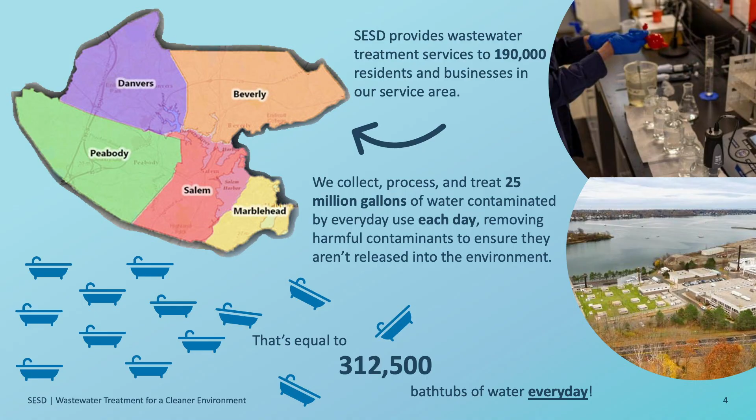So we provide wastewater services to these 5 communities: Beverly, Danvers, Salem, Peabody, and Marblehead. We treat and process about 25 million gallons of water each day, removing the contaminants to make sure they aren't released in the environment. And for those of you in the public who like to hear it in things, you can get around 312,500 bathtubs per day, so, point of reference.

We were established in 1925 as a regional municipal entity by an act of the legislature. We just celebrated our 100th year anniversary last year.

We're governed by a 6-member board. There's 1 member from each community that serves on our board, and then we've got a board chair who has to live outside of the district, outside of Essex County.

60 full-time employees. We're staffed 24 hours a day, 365 days a year, with a professional workforce with licensed operators, mechanics, electricians, lab techs, and engineers.

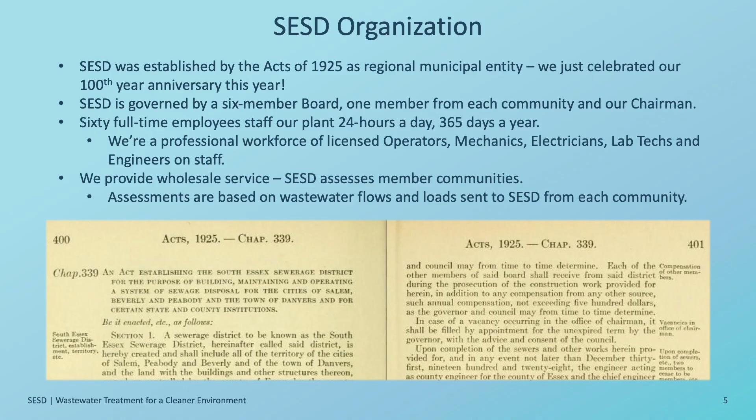And we provide wholesale service. So we assess the member communities based on the flows and loads of what each community gives us. We don't charge rates. We charge the cities and the towns, and then the cities and towns charge the rates to the ratepayers. So a little bit different model than a community-based water system.

David, is that measured at specific points, where is that coming from the community, or how do you actually do it? Yeah, so we sample every 48 hours. We take a composite sample at the boundaries of each border, and we read it for flow, BOD, and TSS. Based on that, we can determine the entire flows and loads and which portion is from which community, and then we break the budget up based on the percentage of what each community is providing to us.

So what do we do? Well, we convey wastewater from our member communities to the wastewater treatment plant located in Salem through a system of large interceptor pipes and pumping stations. The communities themselves own and maintain the sewers in the local streets, but we manage the large interceptor pipes.

In Salem, it's down along the river, goes down beneath near the MBTA station, cuts up along the bypass there, and then takes a right, goes across the toe of Collins Cove, across the Bentley School playground, and then to us at the SESD right next to the power plants where we're located.

We treat, clean, and disinfect wastewater through our high-rate wastewater treatment plant. We pump purified wastewater about a mile offshore to a diffuser located in the Salem Sound off the coast of Beverly.

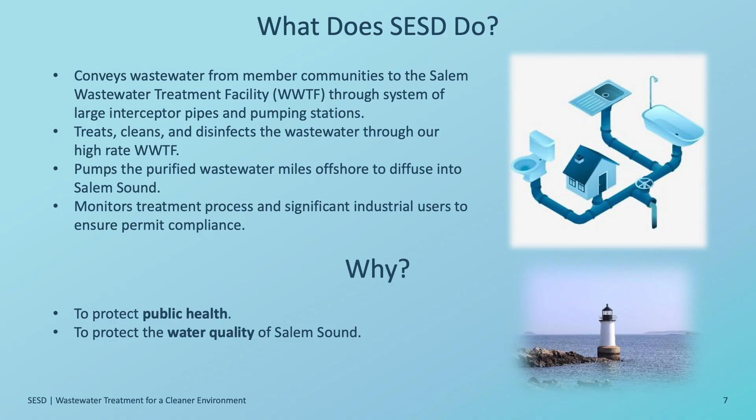So what's in wastewater? Well, certainly all the common things you think about: human waste, lint and hair, gray water from sinks and showers, washing machines, dishwashers, food scraps, grease, oils and soaps. And then some of the things you may not think about that wind up there: household chemicals, wastewater from commercial facilities, breweries, hospitals, Salem State.

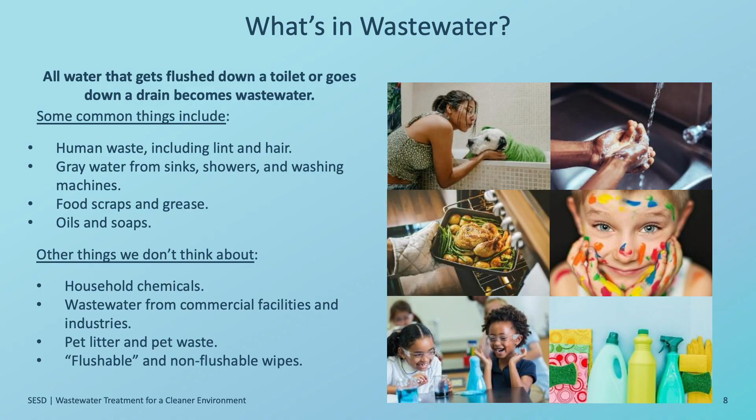Pet litter and pet waste finds its way to us. And then the other thing we're dealing with and messaging about is the so-called flushable wipes, which are not truly particularly flushable. They still don't break down, many of them, and they're an issue for us and for the industry.

We're governed by a permit issued in Massachusetts by EPA. It's a wastewater discharge permit. NPDES is a National Pollutant Discharge Elimination System permit. I'm sure many of you have heard those letters before. These are the parameters within our permit, some of the significant ones.

So the flow limit is 29.7 million gallons per day. BOD and TSS are 25 and 30 milligrams per liter, and we have a mass limit on those two constituents as well. Fecal coliform and enterococci ensure that we're disinfecting the wastewater before it goes out, which we use chlorine to do, but we can't put residual chlorine out into the harbor either, so we have to quench that. So we have a total chlorine limit, and then pH.

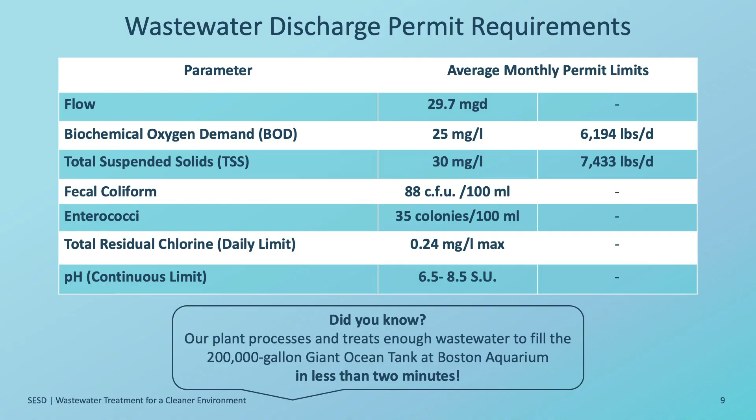So we performed pretty well. This slide's about ready to be updated - we'll get our 2025 data in there now, probably about a month from now. But it kind of tells a picture: influent TSS and BOD, typical ranges around 200 milligrams per liter each. Effluent TSS averaged 19 milligrams per liter in 2024, effluent BOD 12. We did about 24.5 million gallons per day overall average in 2024, which was a bit of a wet year, but not record wet certainly.

Which relates to almost 9 billion gallons over the course of the year. And we did pretty well on the fecal coliform and enterococci limits. We also generated almost 29,000 tons of sludge.

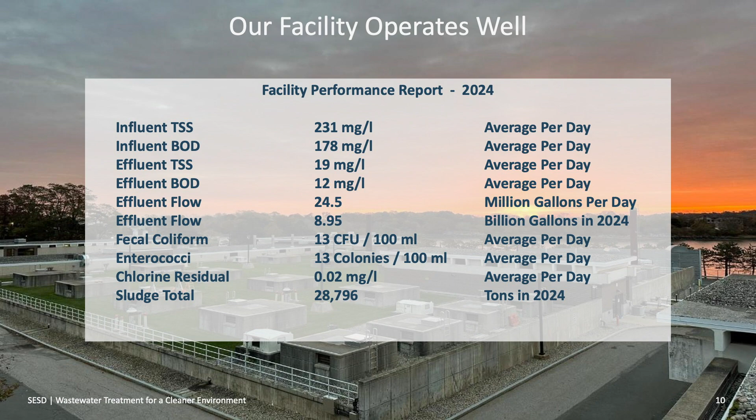I wish it was only 29,000 pounds. But we'll talk a little bit more about residuals in a few minutes.

Actually in 2015 - it failed in 2013, took a year and a half to permit, and we replaced it in the winter of 2015. We did have two of them, so the one that leaked, we were able to take out of service and got all the flow through the other one. Luckily that one held on until we could put in two new redundant 24-inch pipes that went across the harbor. So that was a pretty big project for us.

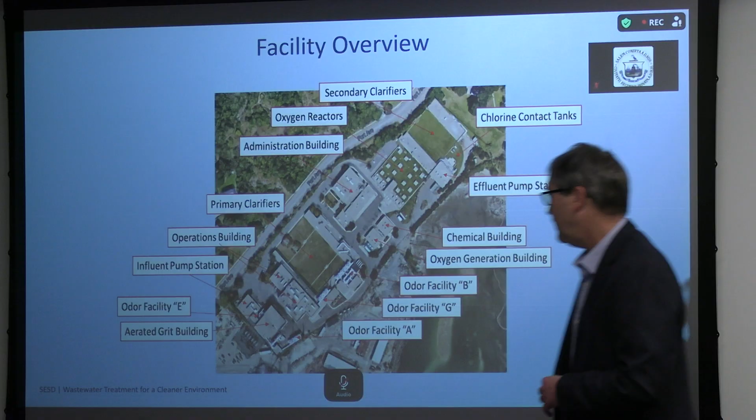So this is an aerial view of our treatment facility, at 50 Fort Ave, right near the footprint power plant, or I guess they're under a new name now. This shows what we've got. We come in at this far end, at the influent pump station where Peabody and Salem comes in. That pipe is 84 inches in diameter when it gets to us, so you can literally walk through that pipe when it's drained down.

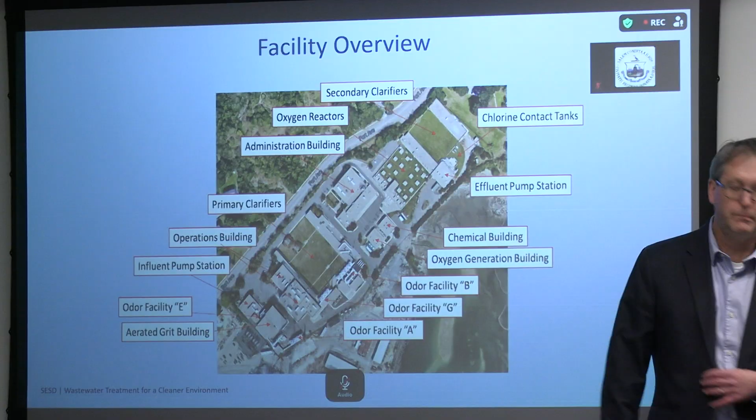It goes to the aerated grit building, and then it works its way through the site. We'll step through the process and talk about what happens in each stage. Two things you might notice looking at this: one, you can't see the wastewater anywhere. That's not because we're not treating it or lack capacity, but because all those grassy areas are underground tanks. We've got underground primary clarifiers right beneath our high tension lines, underground oxygen reactors, and then underground secondary clarifiers and chlorine contact basins at the far end.

How large is the capacity of your tanks?

I guess I don't know. What was the question? How large is the capacity? Yeah, I mean, so we've got about a 4-hour HRT in our primary clarifiers. I think we're about 2 hours in the oxygen reactors and in secondary clarifiers. You know, we just don't think about that.

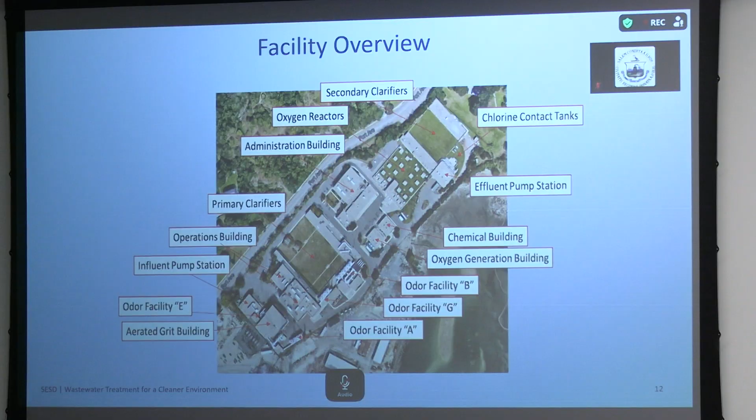When were the tanks installed? Yeah, so the primary system, which is up to about here, was installed in the 1970s. That's 7 primary clarifiers. Each one's about 300 feet long, 40 feet wide, 12 feet deep roughly. And we just finished a project probably this time last year of relining those.

So the concrete had gone bad over time, and so we took each one out sequentially. 4,000 PSI pressure washed off the bad concrete, rebuilt that concrete, fixed any rebar that was going, and then put an epoxy coating on each of those tanks. That was like a 4-year project to work through all those. Roughly $20 million all told.

I might just make a comment in terms of, I've seen images on the web of other wastewater treatment plants, and sometimes they have these big circular settling tanks and et cetera. And in terms of climate, that can be a source for greenhouse gas emissions. This setup here would seem to me to have a kind of reduced greenhouse gas emission compared to what it could have, David, or not?

What we do have is a very, very high amount of odor control because odor is generated everywhere. And so we've got, and those are labeled here, odor A, G, B. And so with those, we're moving a lot of air because hydrogen sulfide is generated. Right. And so we need to treat for that so it doesn't smell.

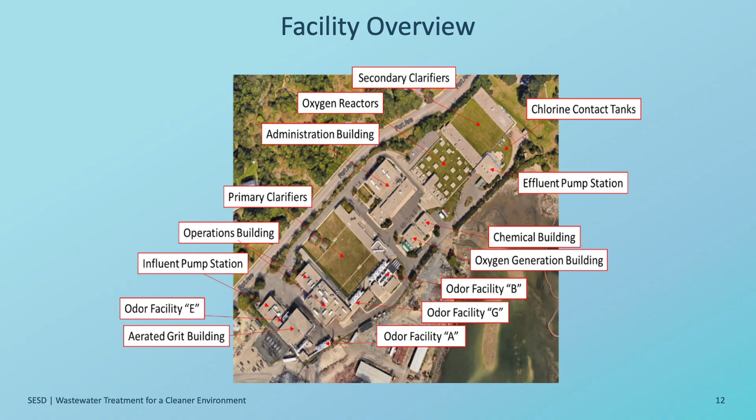So in terms of treatment, we'll step through the treatment process real briefly. So like I said, we have pump stations that are located around. And in each pump station, that's actually where we do our screening. So we've got bar racks at each of these pump stations to pull out the rags, the sticks and other things, the toys that get flushed down the toilet.

Those bar racks are 1-inch bar spacing right now, 1 inch between the racks, which was fine 20 years ago, but with the advent and the proliferation of wipes, the wipes can just make their way right through. So one of our bigger process improvements we need to make is to replace those screens with 3/8 inch or 1/4 inch bar screen spacing to better pull those wipes out.

Because those wipes will make their way into our treatment plant. They kind of re-agglomerate, and you'll find them wrapped around everything. They clog our pumps, and it's just a maintenance nightmare. We spend a lot of time cleaning wipes and other ragging materials.

So after the screenings, we go into the aerated grit chambers. The aerated grit chamber is just an open tank. This is the only open tank we have in our facility; actually, everything else is beneath a hatch. We've introduced air in a helical pattern that scours the organic particles off the sand particles. The sand particles and other grit settle out, and then the organics flow into the remainder of the treatment process.

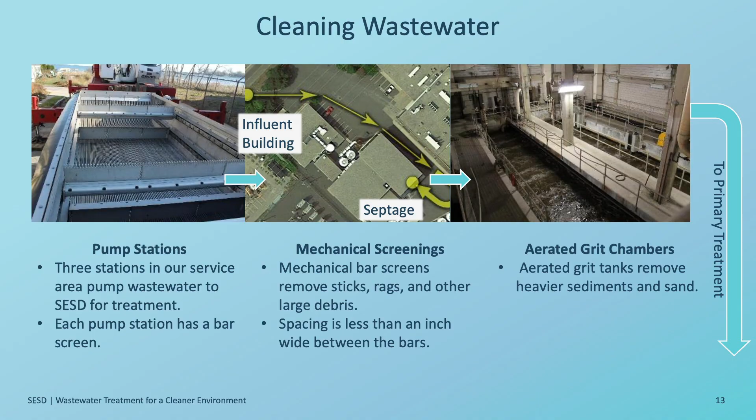So it's the grit removal process. That protects our downstream pumps, so the sand and stuff doesn't make its way through and sandblast our pumps, in essence. Then we go into our primary treatment, which is the 7 underground tanks. Basically a wide spot in the line that'll just allow settling to happen.

We've got a sludge collection system at the base of that, which looks like giant tank tracks really, where the sludge collectors slide along. Those are stainless steel chains and fiberglass flights that move that sludge into a hopper where we can pump it out. After that primary treatment, we're eliminating 30 to 40% of the TSS, and 25 to 30% of the BOD comes out of the wastewater going in.

Then we go into our biological secondary treatment, and we'll talk about the activated sludge process, I believe, on the next slide. That's where the bulk of the BOD treatment happens, and then the final TSS removal happens. And then we go into disinfection, so that's where we add sodium hypochlorite. Hold it in a tank for half an hour or whatever, so it can disinfect and kill the microorganisms that are in there. Add sodium bisulfite to quench the chlorine, and then we pump it out to the harbor.

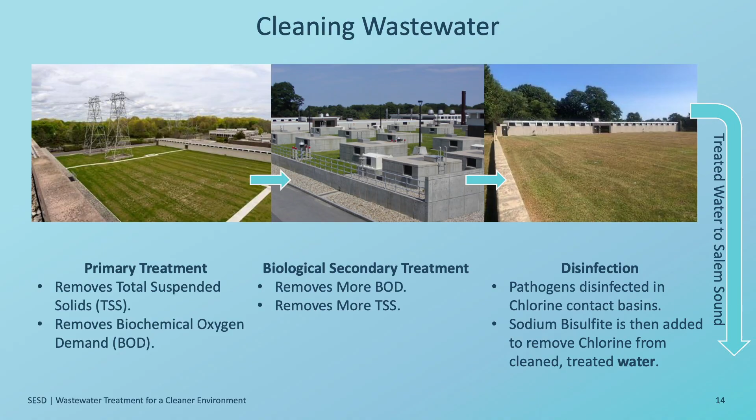So when we were designed, we weren't built up high enough to allow gravity flow under all tidal conditions. So we actually have an effluent pump station, another pump station at the back end of the plant to pump out of the treatment plant. And that's been there since, I don't know, the 30s or 40s, some sort of effluent pump station.

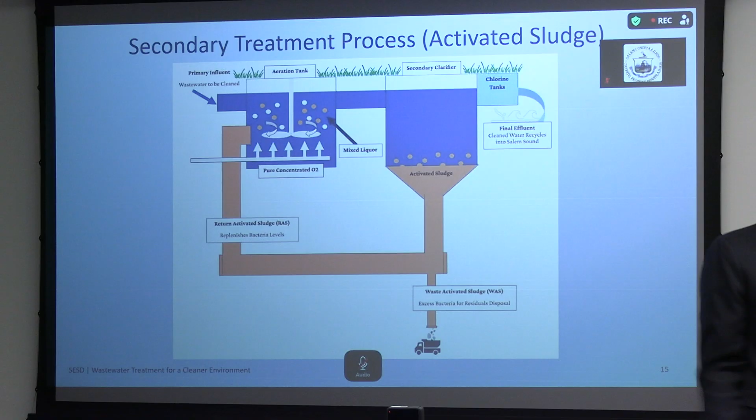So this is our activated sludge process, or a cartoon version of it. It's a little inaccurate, but in our case, we use two things. We use pure oxygen. We introduce pure oxygen into the headspace of our oxygen reactors. Then we've got a mixer in there that entrains the oxygen into the wastewater, and then that allows biodegradation.

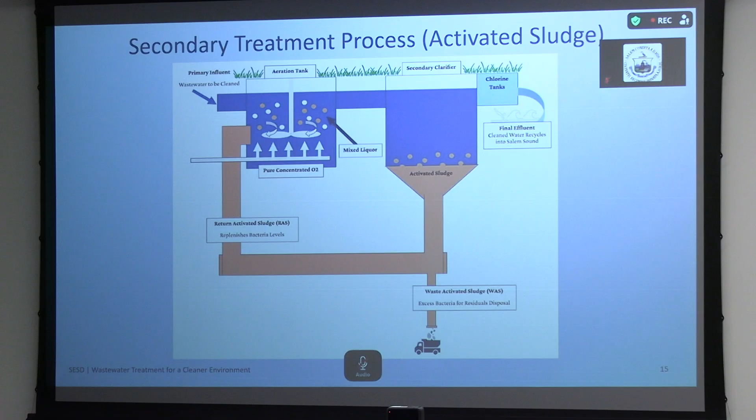And we literally grow a microbiological soup of bugs, bacteria and other advanced life that'll biodegrade the food, the BOD, the poop that's in the wastewater, and reduce that BOD and treat the organic matter that's in the wastewater. Convert it to CO2 and into biological cellular growth.

Those bugs that grow and do that degradation, this is called mixed liquor, and then we put it into the secondary clarifiers. In the secondary clarifiers, we let that all settle out. That gets the final treatment: the clarified effluent goes over the weir, over the top. The activated sludge, the bugs, settle out. And then we actually recycle those bugs, and we use them over and over and over again.

In our treatment plant, we keep them around for about 1.75 days. So that's our solids retention time, our sludge retention time. But we grow more than we need. So we actually have a wasting process we do every day to waste out the excess bugs that grow, and that's where some of that BOD removal is happening as well. Any questions on the activated sludge? It's kind of the basis of wastewater treatment, the crux of it.

So is there anything exposed to the air, if you were looking down at this on your image? Nope, they're contained tanks. They're actually under pressure because we're pumping pure oxygen in them, so they're under a couple inches of water column pressure. So, yep.

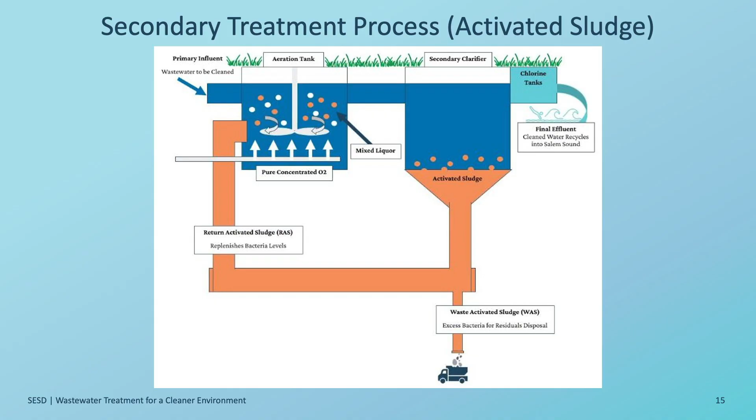Let's see. Useful bugs. This was a video. I don't know if that's working or not.

You mind if I ask, what would be worrisome to that tech? So not all bugs. You've got to culture the right set of organisms, or they don't settle very well. You want them to kind of glom together and settle out. So if you get some, it's called bulking, where you get these stringy things that won't settle out. They're long, the filamentous organisms.

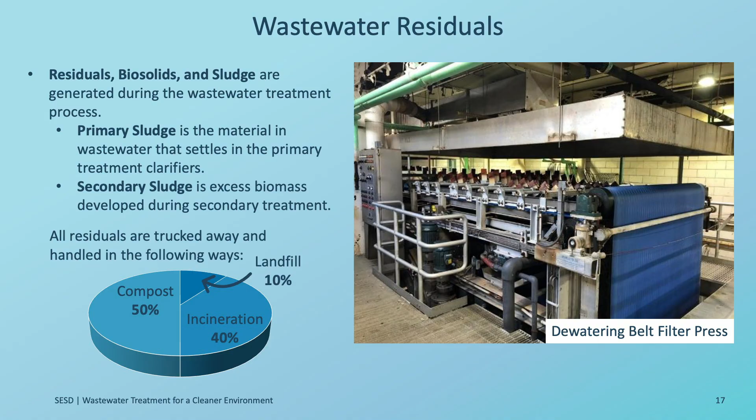Connecticut followed suit. In Massachusetts, there's legislation right now in the House and the Senate that'll probably get approved that's going to ultimately ban land application in Massachusetts, which means our sludge is now taking a 2-day trip out to a composting facility in New York where they're still doing land application. Or it's going to Connecticut and Rhode Island for incineration, and then up to northern New Hampshire and Coventry, Vermont for landfill. So it's a big deal.

The cost implications for you with respect to having to go to either landfill or incineration versus composting? We'll get there.

So we generate about 30,000 tons per year, 29,000, which is roughly 3 tractor trailer loads every day. We haul it out at night. We've got a contract with a company called Casella. We've been working with them for 9.5 years now, and they handle our residuals, and they've got these facilities all across New England and New York that they've been taking it to.

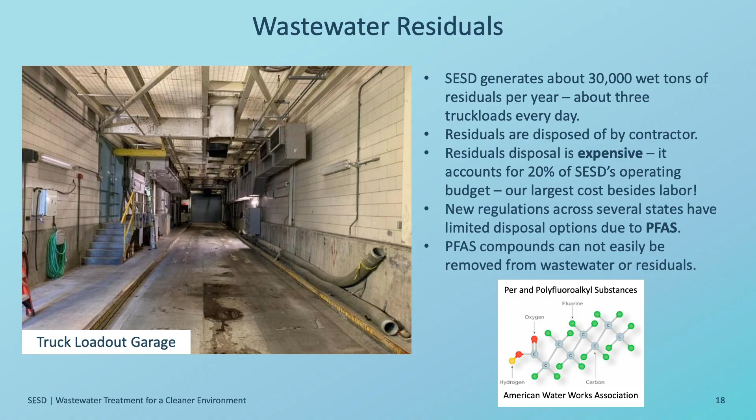But it's expensive. We're in year 9 of an 11-year contract that we signed back before PFAS were an issue, and even now they're expensive, roughly 20% of our operating budget. But because of PFAS and other pressures, a lot of sludge outlets are getting shut down, and the market's getting tighter and tighter. This facility in Fall River, Massachusetts, is putting it on a train and hauling it to Pennsylvania to a landfill. So those are the type of things we're looking at in our next contract, which we'll be bidding this time next year. We're expecting our costs to go up roughly 50% for our residuals, which is our largest line item in our budget.

Technological innovations that you're looking at that would be included in your treatment training, for instance—could you do something that would reduce the PFAS in your residuals, or is that not possible yet?

I was at this wastewater conference for 3 days this week, and probably half the talks were about PFAS and PFAS removal, and there's no proven technology yet. They've been trying—facilities set up in New Jersey trying to do this just shut down. They can't quite make it work yet. There's gasification, there's pyrolysis that's being tried. There's a pilot test that we're going to be a part of, the DEP sponsoring, that's going to look at 3 or 4 different technologies and pilot tests using Massachusetts wastewater sludge. We're going to send 500 pounds of residuals out to California to a pyrolysis facility and see if we can destroy it.

So everybody's looking for a solution. Unfortunately—aren't they doing GAC or something in drinking water? Yeah, in drinking water they're doing GAC. It comes out okay, but then what do you do with your GAC that's loaded up with PFAS now?

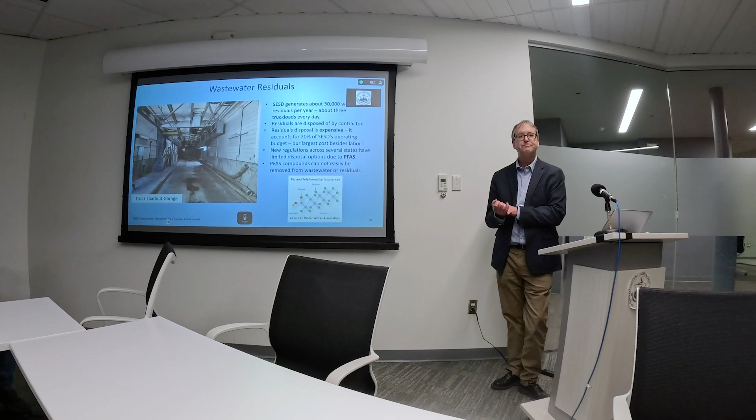But all these solutions are really expensive and super capital intensive. So what we're doing, at least for the short term as we watch this, is looking to replace our dewatering equipment, which is 25 years old, with something that's going to remove more water, so we're hauling less water and reducing the volume we're generating.

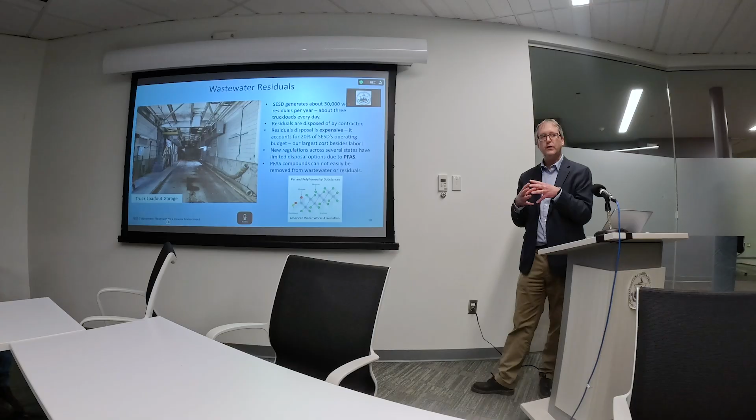The other thing some places do, and we'd love to do—but 20 years ago when we were exploring this, the city of Salem wasn't interested in seeing egg-shaped digesters all along the coast, so if you come into MWRA you'll see those big digesters, because that would do another thing. Is that tertiary? They anaerobically digest the sludge, so you basically reduce your volume by 30 to 40%, because it biodegrades more and generates methane, which you can then use for energy recovery and heat recovery.

But that's been an issue—now we have no land to put it on, since that would be a 5 to 6 acre facility to get a couple of these digesters in. So that's what some places are doing, and hopefully a regional solution comes up. The other thing starting to be looked at is just basically drying the residuals to 90% dryness to reduce volume, but to do that you're using a bunch of natural gas or something else to generate it. So everybody's kind of scrambling for the ultimate long-term solution, and it's not sure where it's going to go.

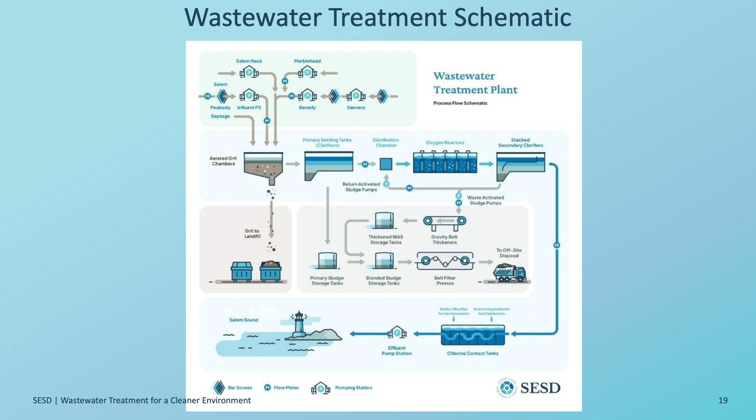Yeah, I think that talked about that. And this is just a schematic of our entire process. It's on our website—I'm not going to go through it today, but it's there if you're interested in taking a scan.

So we'll move on now to our sustainability, energy, and resiliency efforts. When I think sustainability—this is probably not the textbook definition, but it is one—historically we've thought about it with a really broad emphasis on how we keep our organization intact, the rates under control, assessments under control, and sustain our organization so we can continue to be here, maintain our equipment, maintain our assets, and maintain our treatment and what we do. That's been our broad definition of sustainability.

When I break that down, some of the ways we're doing this: one, we've had a very active energy efficiency program for over 20 years. This graph on the right shows where we were, up at 25 million kilowatt hours when our secondary plant went online in 2000. Then, by turning equipment off, finding out what we needed and didn't need, and doing a whole lot of different energy efficiency upgrades, we got down to 18 million in 2017, 2018. Also as part of the energy management program, we put in a cogeneration facility.

We've got a constant heat load associated with our odor control, so now we're generating our own power. Unfortunately, it's fueled by natural gas. So we're buying natural gas, making our own power, and using that heat for our process heat load.

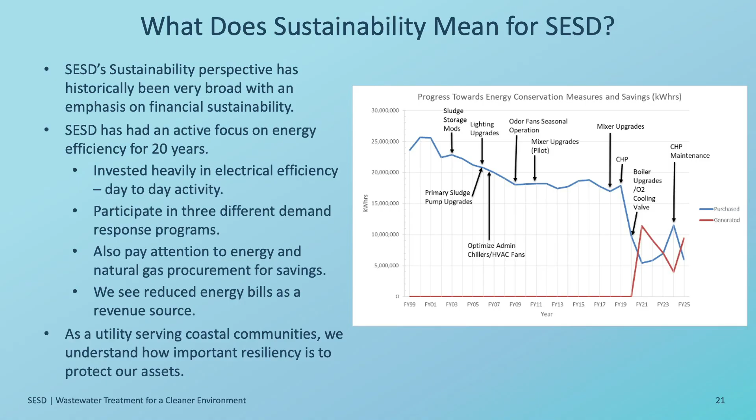That was a partnership with Beverly in a CZM grant to do that. As a sewage district, we can't actually get funds through CZM directly, it has to go through the communities. So it becomes a little troublesome for us to get these funds because we've got to partner with another community, and we can't be the grant signee, so we've got to have the right contractual relationship. This one worked okay.

We gave some effort for them as part of their grant payment - we just gave resources, our labor time, to produce this.

Is that astronomical high tide you mean? Or with storm events, during a nor'easter? Right, nor'easter - I don't think it comes up during just astronomical high tide.

As part of that grant program and communication, one of our contributions was to purchase some little floodgates, because we've got a garage there that's down a bit, the low point of the site. So if we see a nor'easter or hurricane coming, we can put these in to keep it from inundating our pump station. Haven't had to deploy them yet in the last few years, but it'll be nice to have them should something be rolling in.

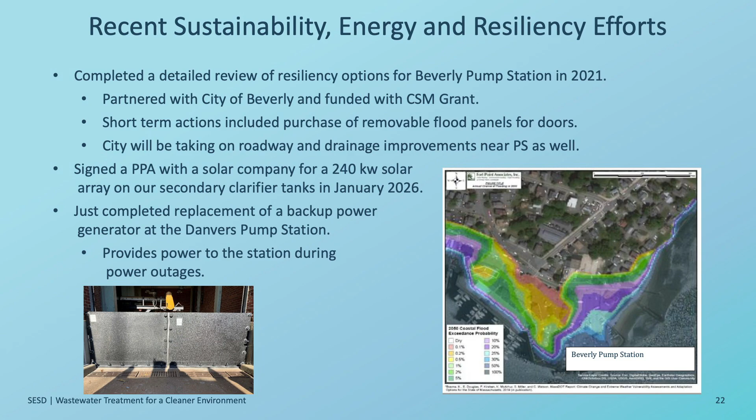Just one quick question for the public - Dave and SESD did share that study on resiliency in Beverly, so members did get a copy of that. That might be a different study though - this is the CZM one. We have another study we're talking about in the next slide, the AECOM one. While I was waiting for the AECOM report I went ahead and shared it with the members already.

Yeah, that was an interesting project. They're doing a lot over there.

And then here's the other one - we're finishing now a 20-year capital improvement plan for the treatment plant, our pump stations, as well as our collection system. I did share that resiliency chapter of that report that's gone out. Reviewing that, I'm comforted a little bit that there's no immediate needs for sea level rise and storm surge out there. I think we do have one set of garage doors at our effluent pump station that I'll sleep better once we come up with the right solution on, because that would flood our entire tunnel system if it came up to that high of an event.

Never seen it on the road there, so we've still got another foot or two above that. But if we had the right conditions and the right storm surge, it'd have to be more of a Sandy-type event in my mind than just a high tide. But it could happen certainly, so that's something we're thinking about.

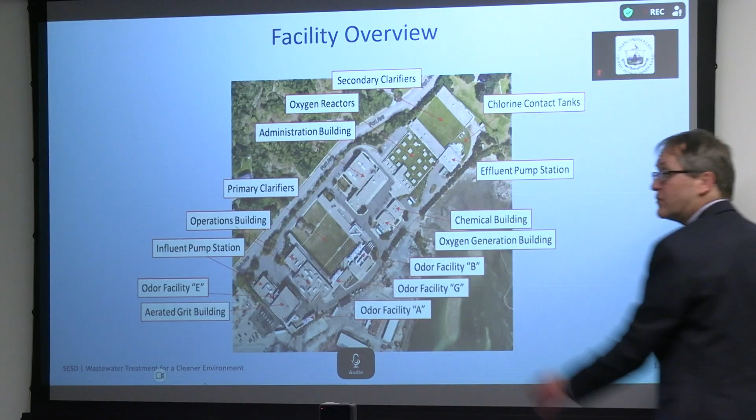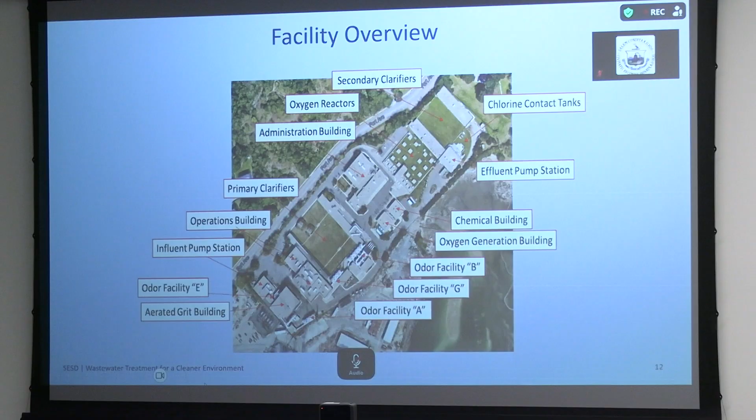So on those high intensity rainfalls, we'd have to look at our current stormwater collection system, which is really just isolated to our treatment plant. We've got 1 or 2 catch basins up on Fort Avenue, but most of it, there's nothing from the city coming onto us. You don't have MS4 coming into your facility where you're discharging out of anything? No, we kind of have our own self-contained system, like 1 or 2 catch basins on Fort Avenue. So we've got a stormwater discharge permit for our little system.

We might have 20 or so catch basins on the plant, so we have not looked at that for capacity at this point.

Just as an aside, that's one of the things when I did some work with GLSD — that was exactly the issue for them, that they had on-site problems related to flooding, and not so much MS4 coming into the property, though they did have some of that too, but mostly problems on their property managing stormwater, and the potential for high intensity events meant potential flooding affecting some of their processes.

You don't look like you have. Well, I have not seen any major ponding. So it's not something that's risen on the radar very high.

And then all the other pump stations are located basically on tidal rivers, so I haven't thought about rain coming down from that side — it's about the tides, because we're not... yeah, they're all on the tidal side.

So we're in Q&A now. Sure, in terms of your presentation. Okay, cool. So let's see if there's maybe 1 or 2 more things. Okay, so let's see, we just...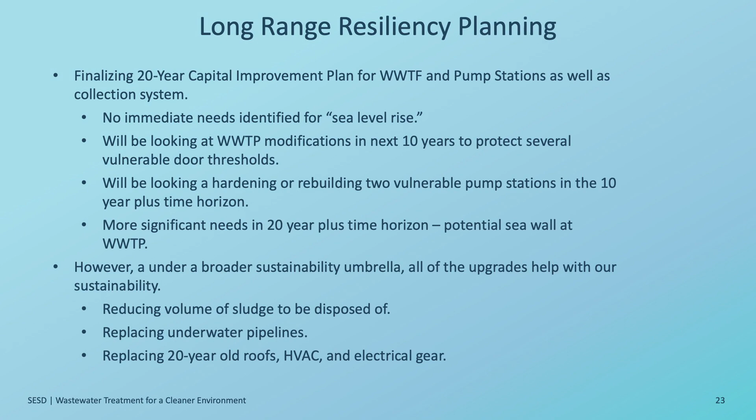What is the option? I mean, what is the alternative? At this point, it serves a couple hundred thousand people. I feel your pain, but I can't understand what other options people would be looking at besides reinvesting in this facility. We dump it in the North River like they did in the Thames, and we wind up with the Great Stink.

That's basically it. Within two or three years, we'd have to defer money out of maintenance, so things would start to break. We'd be under permit compliance issues fairly quickly, and then we'd probably be under a consent order, and then EPA fines and being told how to do it as opposed to approaching it in a logical way, which we think we have. So, that's where we're at.

And this is not intended to be a political question per se, but given where EPA is these days with respect to enforcement activity, are there any potential opportunities? Obviously from an operating safety standpoint, you want to do all this maintenance and investment. Have you had any sort of indications from the federal government that EPA is not going to be as enforcement concerned as they might have been in the past?

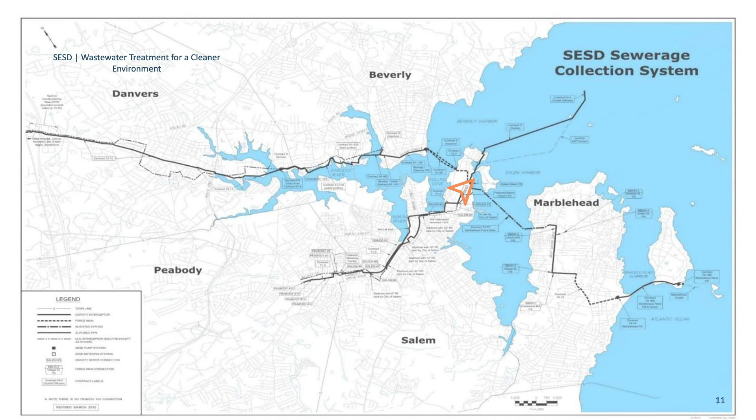And during summer, when it's not flowing very fast, it definitely generates a lot of hydrogen sulfide. So we've got a downstream siphon structure here that is in very, very rough shape because it's where it's scoured out. So that's one of the highest priority projects, is to get in and redo that before it completely fails.

We were able to inspect both that force main and that siphon downstream of it. We did a project with CDM Smith where they brought what's called a sewer snake. So it's a sensor we put down. It's about 15 feet long with electromagnetic sensors on it that we're able to put in a pipe and float down the pipe and determine wall thickness all along this pipe. And both the force main and the siphon pipes were in good shape. So that's encouraging, very encouraging.

I was very afraid that 30-inch force main was going to need significant work, but it's a few areas of pitting, at high spots, but it's not bad. So I think in the mid to long term, probably midterm, we need to come up with another chemical addition or a way to operate that force main so as not to generate the same amount of sulfides.

So this was a 20-year capital plan. When do you, as the board, think about the next plan? I mean, do 15 years go by, or do 18 years go by of a 20-year plan, or is it more like 10 or 12 go by because you're already starting to think about who are we going to contract for the next 20 years?